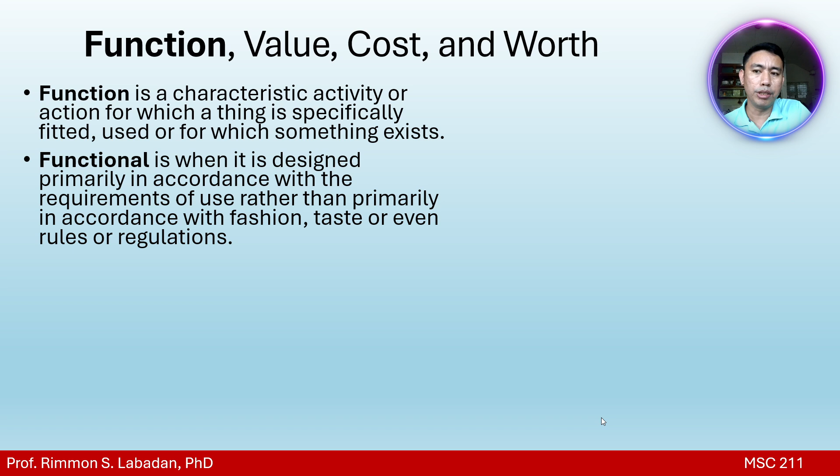So that's the term functional. When you say a thing is functional, it serves its purpose in accordance with its primary requirements. A basic function is defined as the performance characteristics which must be attained by the technical solution chosen.

So for the basic performance, like the example of the car, its basic performance should be to transport people or freight from one point to another point. We say that's the basic function.

Basic function of a saw is to cut, right? Basic function of a wrench is for tightening. But sometimes Filipinos use a wrench like a hammer, which is not its basic function. It's used for tightening, for tightening of bolts.

So that is what we call the basic function. The secondary functions are the performance characteristics of the technical solution chosen, other than the required basic function. For example, the basic function of a spoon is...

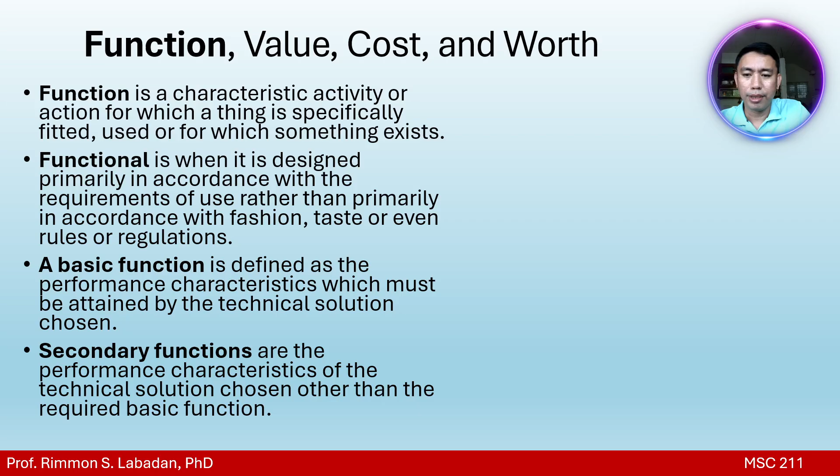So, for example, the basic function ng window sa bahay natin is to transmit light, right? So that's the technical solution to a function. Pwedeng gumamit tayo ng glass, kasi yan yung function natin, magdaanan ng light. So kung nag-window ka pa tapos opaque yung material na gamitin mo, it's not functional, it doesn't serve its purpose. So we need to use glass so that makapass through lang ang light.

And the secondary function, pwede nating lagyan ng secondary function ang window. Pwede yung may tinted, para hindi masyadong mainit yung ultraviolet rays, ganon na mga aspect.

So, in Japan, I was in Hokkaido, yung window most of the time, kasi inside the house we use heater. Normally sa mga window lumalabas yung heat, so inefficient yung heating system ng bahay kung lumalabas naman yung heat, normally sa mga doors, sa mga windows. Kaya even yung windows nila is nakadoble.

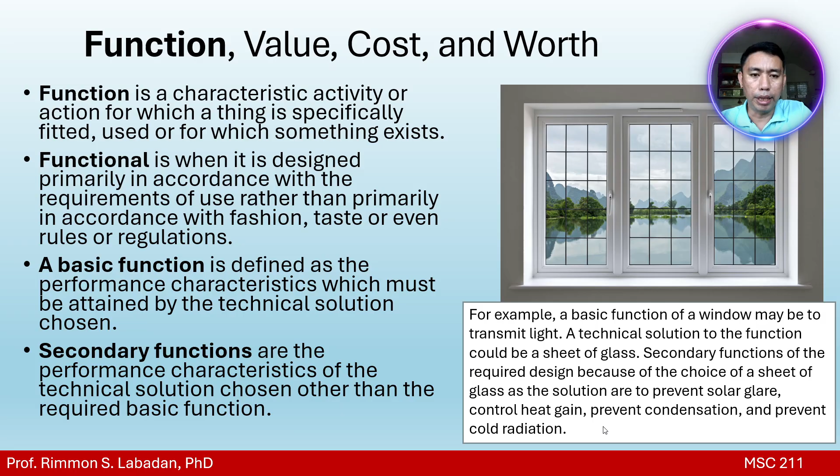Then let's move to value. Value is a measure expressed in currency. Maraming paraan na maipapahayag ang value. Of course, not all can be expressed in currency, but basically in economy or in engineering, we express most of the time in terms of currency, and even effort, exchange, or on a comparative scale.

Which reflects the desire to obtain or retain an item, service, or ideal. So ito, may currency, may effort. We say that a thing is valuable because of the effort you gave in it, to create such thing. Yung effort mo, so pinapabayaran mo, we say that's valuable kasi yung effort na ginawa ko dyan. Even yung i-compare mo sa iba at makagawa ng thing or object, hindi basta-basta compare sa normal na paggawa ng iba. So, we say that is a measure, ang value, that is a measure of currency, effort, or anything.

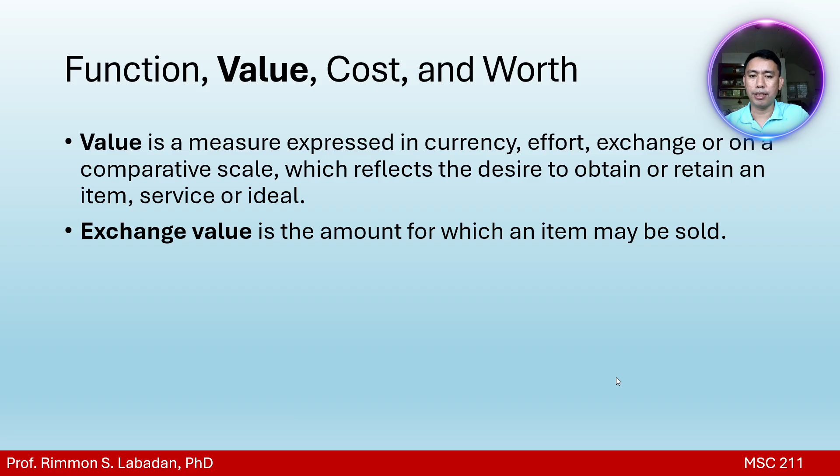Esteem value, this is the amount an owner or user is prepared to pay for prestige or appearance. So maybe we can have the thing or an equipment or apparatus na medyo simple siya, pero the owner esteemed it very highly, diba? For example, yung mga ochre na vase, ganon. Pag tingnan natin, oh simple naman yan kasi kahoy lang yan.

But there is, let's say, example yung cultural value niya and esteem value, na ito galing pa ito sa mga ninuno namin, ganon. So, when you buy that ochre, you just do not buy it because of the value of the wood that was being used. So you also consider the esteem value, other values like the prestige, the history, the appearance, ganon.

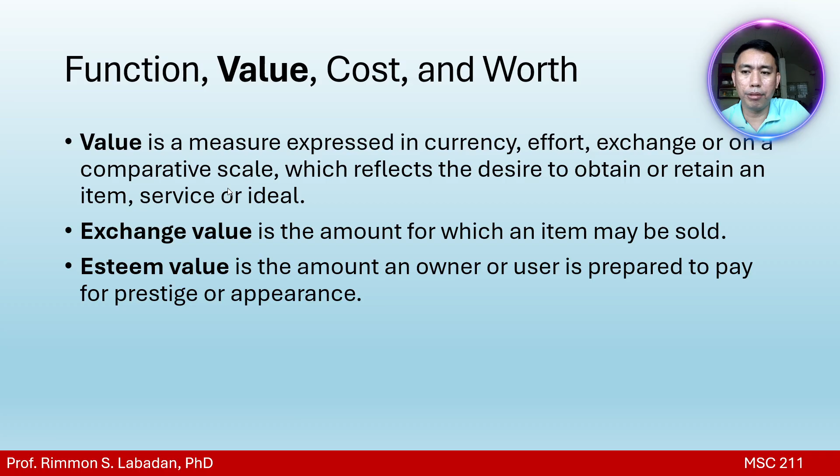Rarely does the owner directly ask what magnitude of earthquake a building can withstand. So give an esteem value. Also, when you price yourself as a professional, if someone asks you to design for them, they might say architecture is just drawing, engineering is just calculation, sketches, and so on. So give an esteem value to your profession. Don't undercharge, and especially don't work for free, because our profession has esteem value—our ability and our skills. That's what I mean by esteem value.

So use value, for example, is a measure of the function of an item. Take a chisel—look it up if you're not sure, it's like 'tigib' in Bisaya, the tool used for carving. A chisel has high value as a tool for cutting wood, but low value as a screwdriver, although it could be used for both tasks.

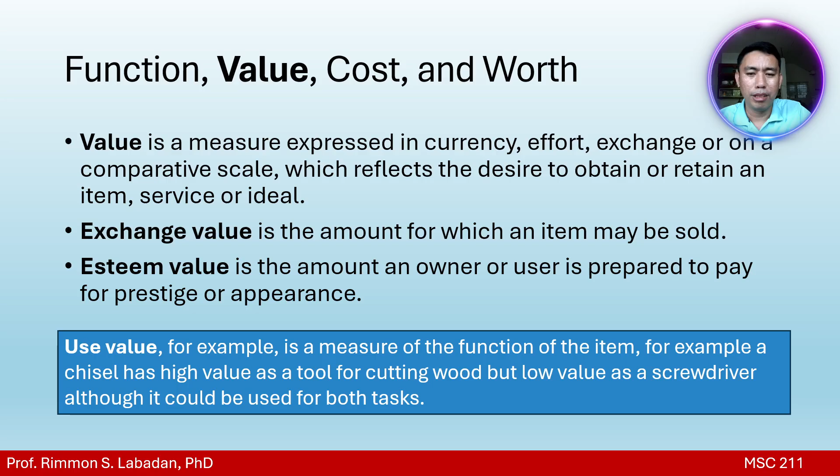Let's move to cost and worth. We have function, value, and cost and worth. Cost is the price paid or to be paid—it's still an amount. It's often said that one man's price is another man's cost. So when we buy something, there's a price and there's also a cost. Cost can be divided and distributed among elements and, to some extent, function.

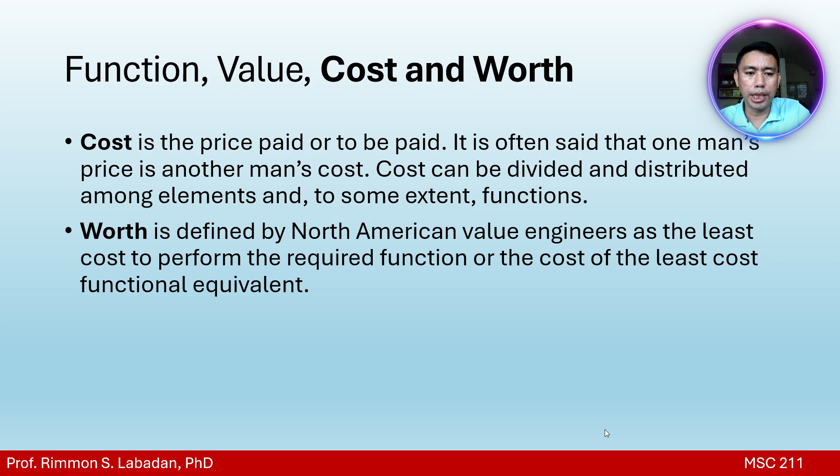Worth is defined by North American value engineers as the least cost to perform the required function, or the cost of the least-cost functional equivalent. For example, your professional fee, say 5,000 per day—that's your worth, the least cost that can be paid. That's what we call worth—for an object, its worth is the least cost.

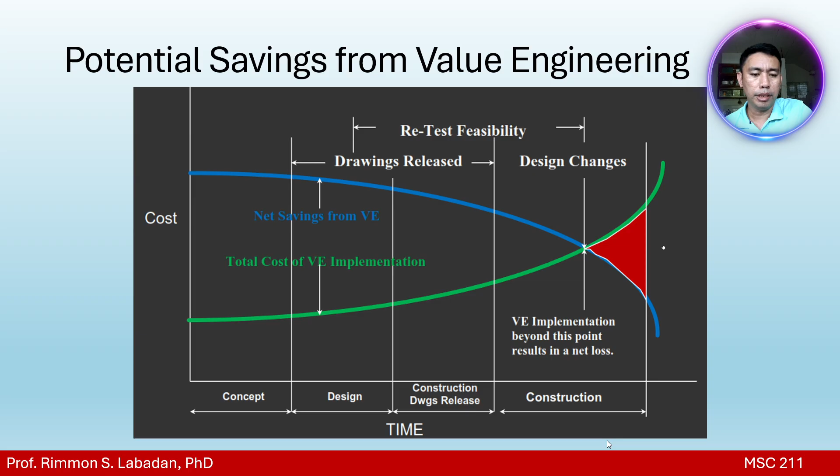Okay, so let's move on to the phases of value engineering. These are the steps and phases when we are doing value engineering. We start with orientation, then comes information, speculation, followed by analysis, program planning, program execution, and status summary and conclusion. Let's go through them one by one.

So, the orientation - this is what is to be accomplished. We have to talk with our clients. What is to be accomplished? What does the client want? Is it a hospital? Does it look like a hospital? Or is it a flood control project? Does it look like a flood control project?

So we need to clarify what is to be accomplished. What does the client need or want? What are the desirable characteristics? What do you want to see? Because sometimes clients want so many things, right? Engineer, I want this, I want that, but the budget is limited. But you need to clarify that - ask what they really need.

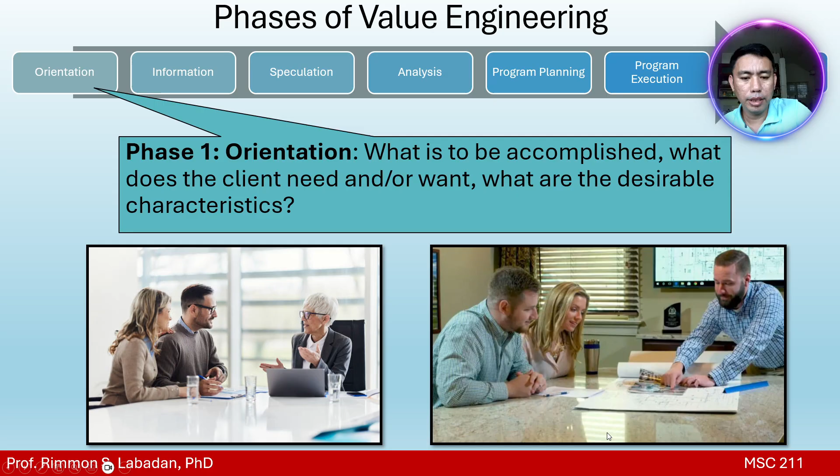This is a sort of orientation of the project, before you can conceptualize. So after orientation, then comes the information. In this phase, we try to secure all costs, quantities, drawings, specifications, manufacturing methods, samples, and prototypes.

So here, you're going into a bit more detail. Try to estimate the cost, the possible quantities - not too detailed, but you have an estimation. For example, how much would it cost to build a house if it's steel versus concrete, per cubic meter or per floor area. So you try to calculate that in general - the drawings, possible sketches, specifications, and even the possible methods.

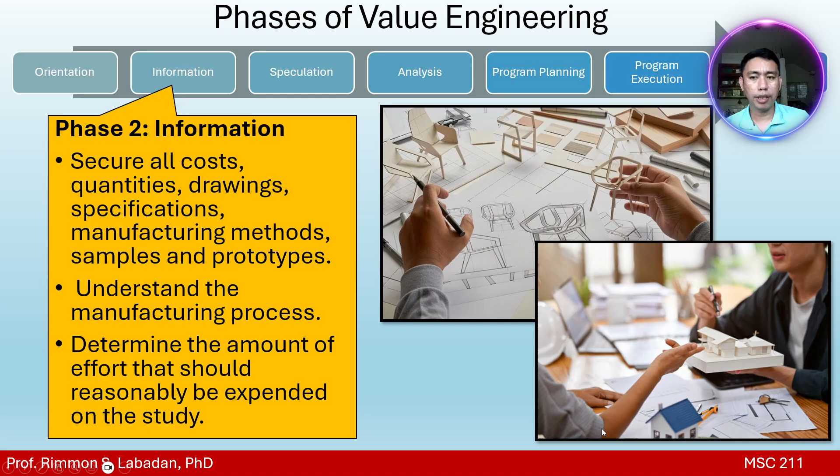Then after information comes speculation - like brainstorming. You have to talk with other people in the office. Don't just rely on yourself - even if you're the head engineer or head architect, don't do it alone. You have to talk to other people, especially in the office, who also have relevant information.

Somehow, brainstorm together about what-ifs - this is what we'll use, this is our plan, this is our design - and let others comment. Be ready for comments and possible improvements. There's no room for ego there, because it's for your company or your firm, right? So just be open - not to criticism, but to comments and possible improvements.

If there is criticism, it must be constructive criticism.

After the speculation phase, we come to the analysis phase, which is more specific. We estimate the money value of each idea and rank them in order. It's similar to a SWOT analysis - we determine the strengths, weaknesses, opportunities, and threats. For those who have studied management, you've probably encountered SWOT analysis before.

In this phase, we consider the availability of materials. For example, if we use pre-stressed concrete, do we have suppliers selling pre-stressed concrete or pre-stress tendons? We also look at pricing - for the specific method we'll use, what's the possible pricing? What's the long-term cost if we rent versus buy equipment? These are detailed considerations, including required maintenance if we buy heavy equipment like bulldozers and cranes.

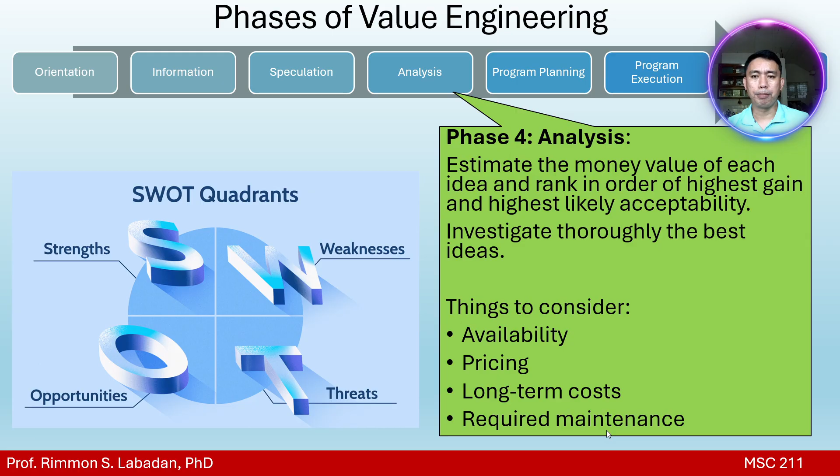After we've established what we want to use - let's say we decide on steel - we move to program planning. We establish the manufacturing program, operations, delivery, possible redesigning, and production of personnel, including where to hire.

This phase promotes creativity among involved parties. In program planning, our creativity skills really come out - how creative we are, like an orchestra conductor.

Construction is very messy, hard to manipulate because there are so many angles to consider. It takes managerial skill as an engineer or architect to orchestrate and manage programs, activities, and people. Equipment too - how do you manage that? It's similar to construction management - it's still a skill.

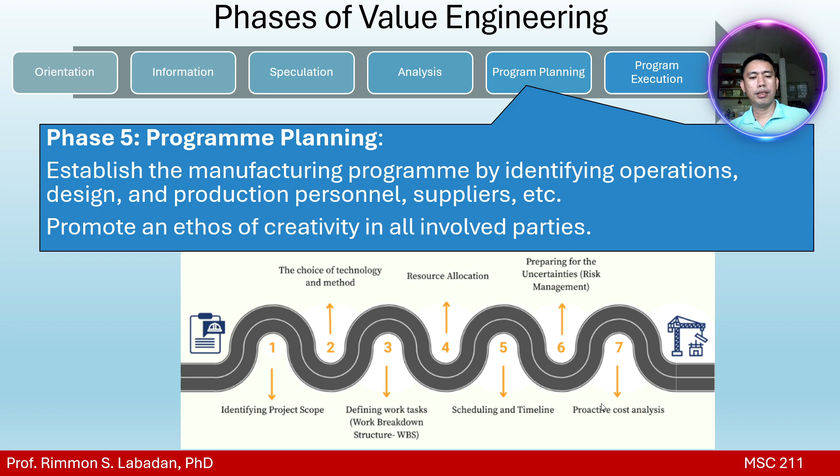After we've programmed, we start with program execution - let's pursue the program and evaluate and appraise further suggestions. Maybe there are pilot tests, preliminary trials to see if it works.

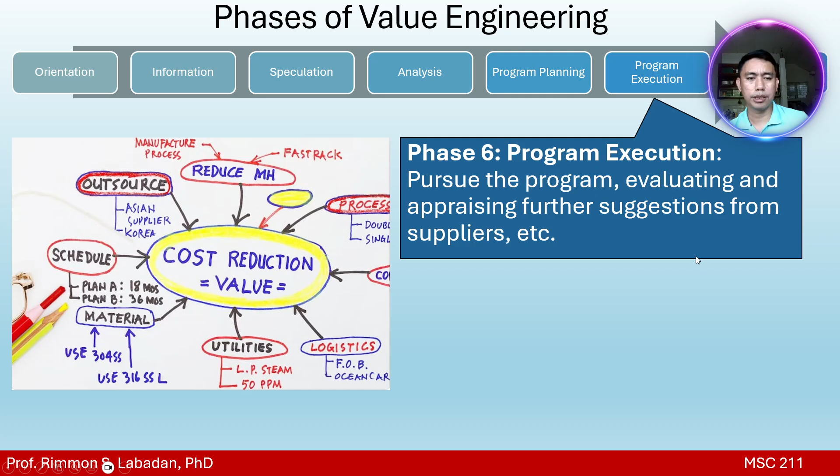After that, we have the status summary and conclusion. If in a position to take an executive decision, we act on the new idea. After mixing, if we say it achieved 3,000 PSI, we can proceed - go on with this idea. If not, we make recommendations to those who make the decisions.